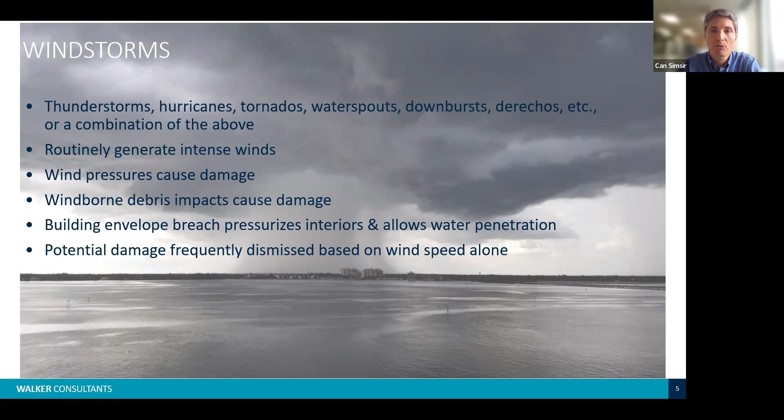So potential damage from these events is sometimes dismissed based on wind speed alone. But there are other factors besides wind speed to take into account that affect buildings and potentially damage them. We'll be looking into those factors as well during this presentation.

Damage caused by windstorms - there are several types of damage listed here, but I think there's more that can be added onto this list. For the roofs, definitely we see blown off, uplifted, and impacted roofs. We see collapsed brick facades, localized structural failures in buildings and other structures. As I mentioned, windborne debris impact is a big concern.

When debris breach glazing and other components in the cladding, they'll damage not just the interiors, but also cause damage to the framing components of these window and door systems. And as the interiors are breached, you'll get pressurization of the interiors, which will cause damage to the interior partitions in the buildings.

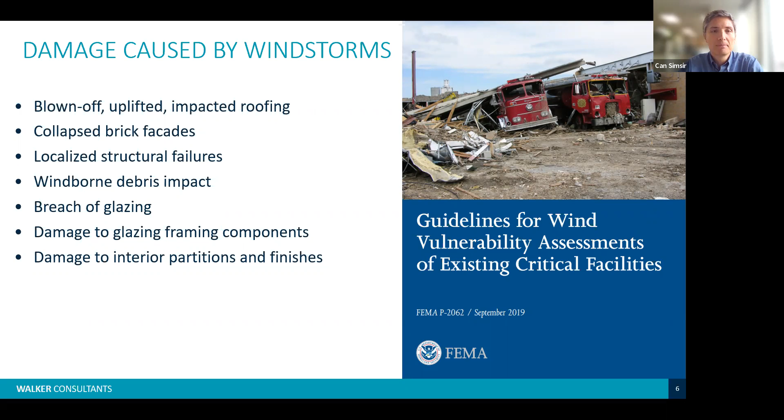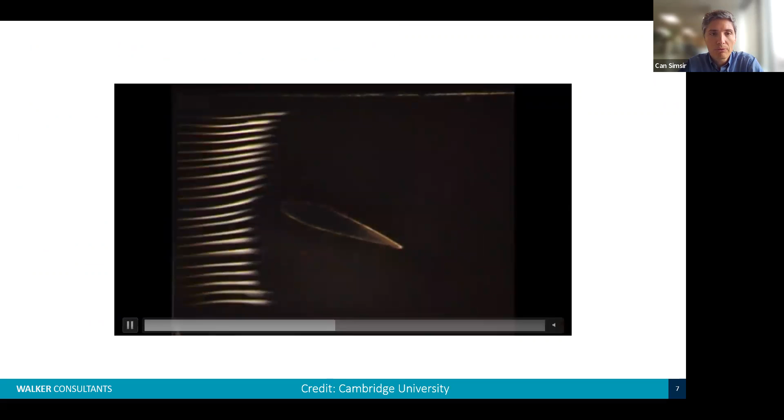This is an illustration of an airplane wing. You see the cross section of the wing in the middle, and this is a video that shows the wind flow around the wing. As you can see, the flow is smooth and streamlined - what we call laminar flow. The wind flow around wings is one thing, but the wind flow around obstacles like buildings is an altogether different environment. So in the next slide...

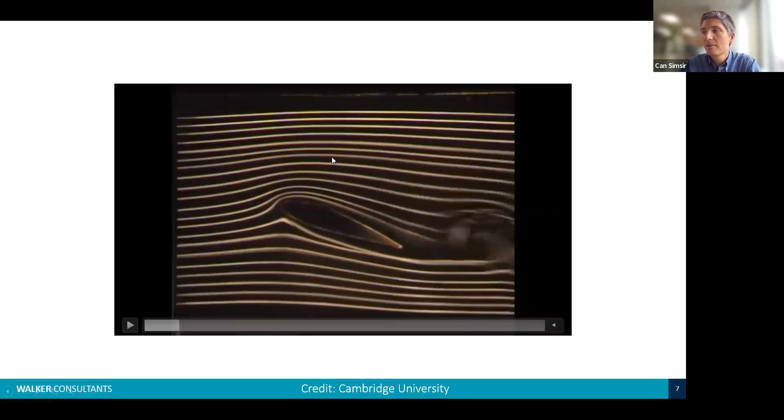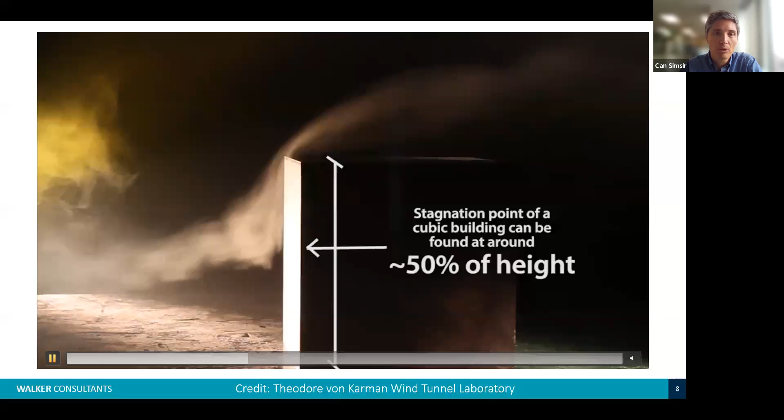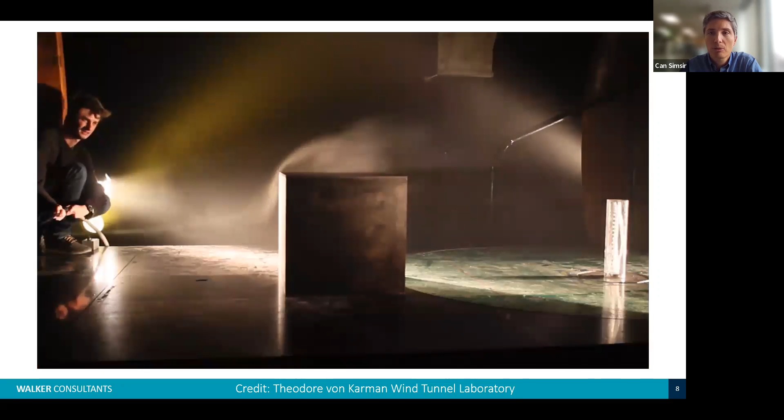What you're seeing is a block in the laboratory that simulates a building and the wind flow coming at the building. Buildings are essentially obstacles in the wind. When the wind impacts the building, it creates a turbulent flow that goes around the building, creating vortices, such as this horseshoe vortex that you see in the middle here.

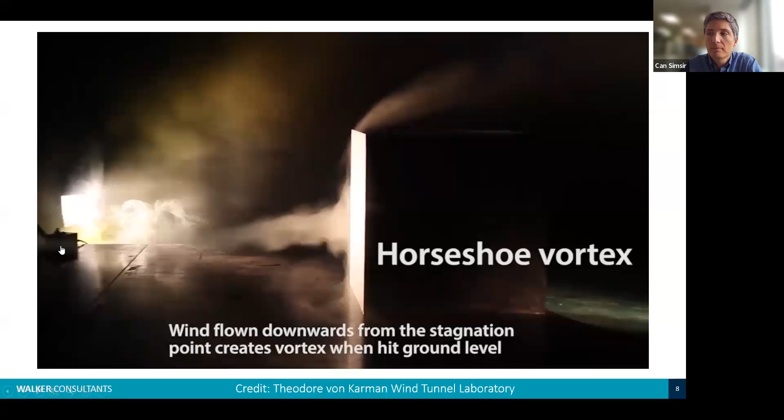Dr. Simsir, let me jump in and ask one question.

I think there is a misconception in the industry that the leeward side of the building is not impacted to the extent as the windward side that receives the brunt of the impact of the wind. Can the leeward side of the building sustain damage given enough wind speed to the windward side?

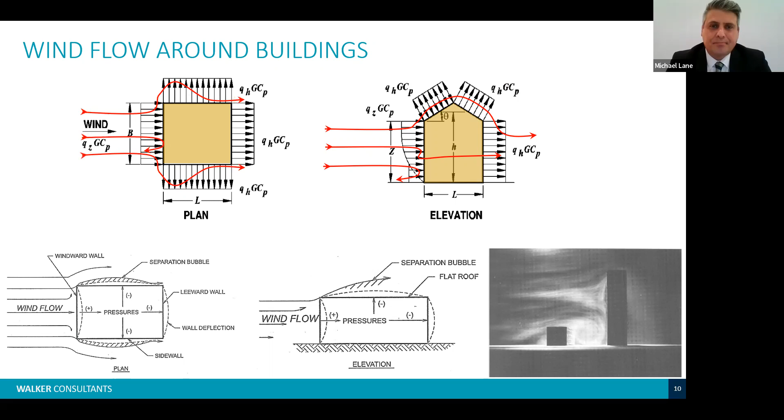Correct. As you can see in these images, the leeward side is subjected to intense suction pressures in addition to the positive pressures on the windward side. So you will see depressurization of the exterior facade on the leeward side of the building.

Now, in some storms, such as a hurricane that affects a property, as this hurricane passes over the property, you will see a complete reversal of wind direction. That means the building elevations that were subjected to positive pressures before will now be subjected to negative pressures once the storm passes over the property.

So your windward might become leeward, and your leeward might become windward during the course of a hurricane going over the property. That's another reason the leeward side may also see wind pressures, because that becomes a positive side of the building, or windward side.

As I mentioned earlier, another phenomenon that occurs is the internal pressurization of the building, shown in these two bottom images. If there is a breach in the building envelope, that interior pressurization will be even more, adding on to the exterior pressures outside the building. So the building will be subjected to even larger pressures.

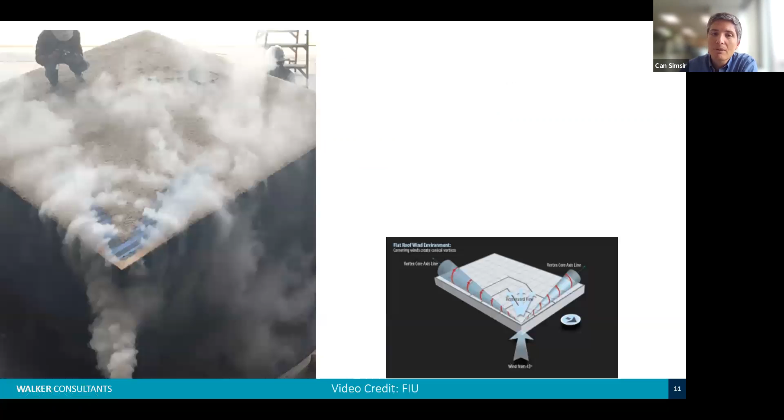This is a laboratory simulation of winds coming at a roof. That wind flow over the roof creates conical vortices, shown in this illustration at the bottom right. You'll see this horseshoe pattern forming in the roofing gravel.

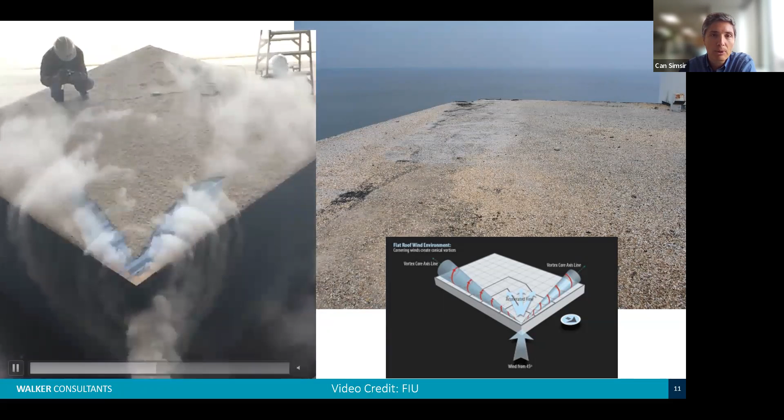And it's not just in the laboratory, but we see this in the field on building tops where roofing gravel has been scoured in a horseshoe pattern due to those vortices generated on the rooftops during a hurricane or other intense storms.

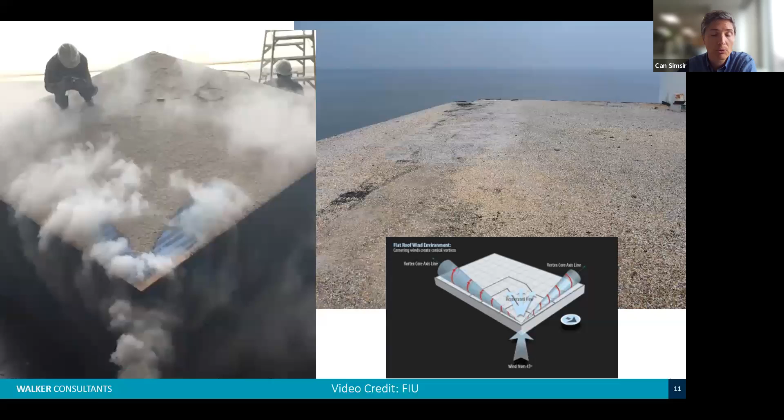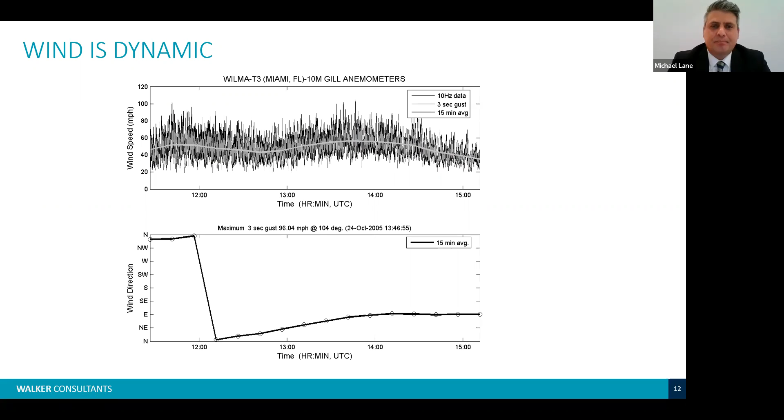Now, Dr. Simsir, is that typical, that you see this in many extreme wind events: category 3 and 4 hurricanes, tornadoes, derechos, and others? Yes, especially in hurricanes, regardless of intensity, if the eye of the storm passes over a property, or the property is close to the eye, you'll see this intense change in direction of the wind. For other storms like tornadoes, you might see that as well if the tornado is very close to the property.

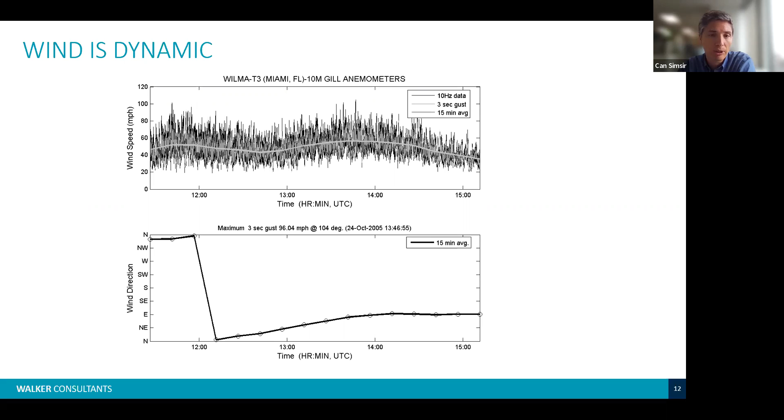When you consider that you might see several fluctuating cycles a second, then in a long duration storm such as a hurricane, these components and their connections may buffet repeatedly for thousands of cycles over many hours during the storm.

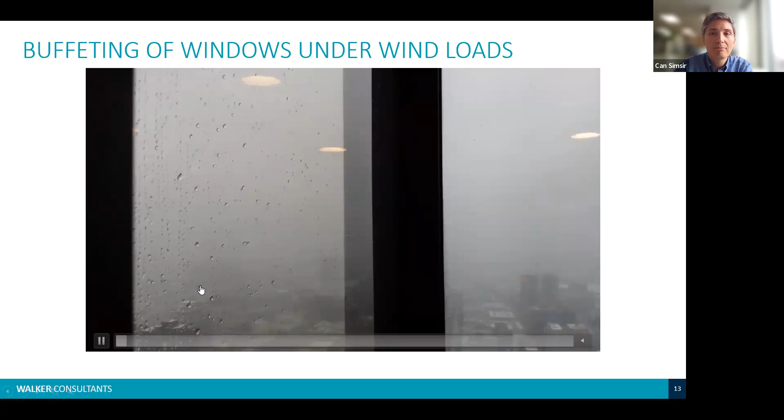One thing that we see commonly with hurricane property insurance claims is if the window is not cracked or displaced, no damage has occurred, according to the insurance company adjuster. Is it possible that the building envelope could be compromised by this buffeting action, or the movement or vibration of the windows in an extreme wind scenario?

Yes, so it is potentially possible. For instance, these windows will bend and deform under pressure during the storm, even if they don't break. The framing joints of the windows will get exercised with buffeting. I have an animation later on that will illustrate this phenomenon of a door.

In addition, the window gaskets and glazing stops will displace and loosen as well. So all of this will create avenues for water to infiltrate through the window and into the building, even though the window may appear intact and undeformed after a storm. It's best to inspect those windows after a storm.

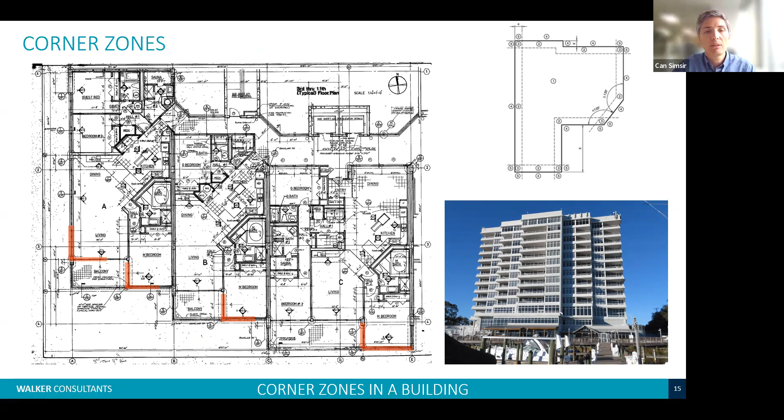We often hear about the 74-mile-per-hour wind that starts a hurricane, when a windstorm becomes a hurricane. But we note that that's the sustained wind speed over water. As that hurricane moves over land, the wind speed that's defined as a hurricane will drop.

So a sustained wind is defined as a 1-minute wind in the building codes, the wind that's averaged over a 1-minute period. If you look at the gust, it's defined as a 3-second average wind.

And so wind speeds can be measured for different averaging times, whether it's 3 second, 5 second, 1 minute, or 2 minute. But it's important to be mindful of these averaging periods, because you might end up seeing different wind speeds for the same windstorm event. The height at which the wind speed is reported is also important. But the building code provides tools for us to convert these numbers between each other.

Another important factor is the looseness of the building. That's not a technical term, but it's the term engineers will use to address permeation of the barrier, of the envelope. If the building is loose, not tight, air and moisture can get into the building, and obviously during an extreme wind event that can cause additional damage.

And finally, one additional factor that has to be considered is the height of the building. Dr. Simsir is going to discuss how the height of the building may play an important role as well. Yeah, thank you, Mike.

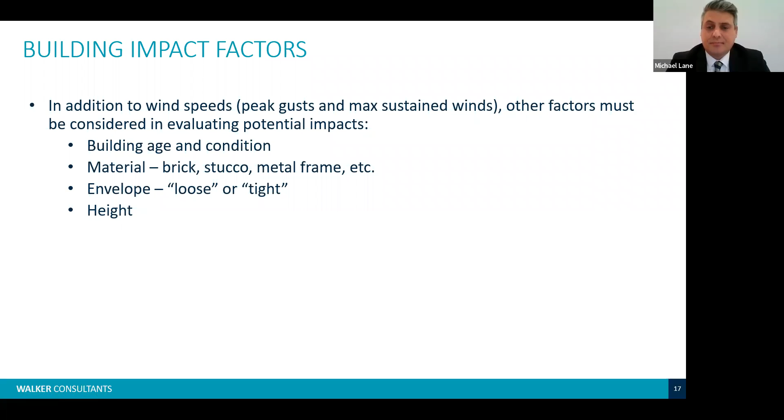So the next question is, does wind speed always increase with height? The short answer to that is no. We have some windstorms, such as tornadoes and downbursts, that will have a variation of wind speed over the height or the altitude.

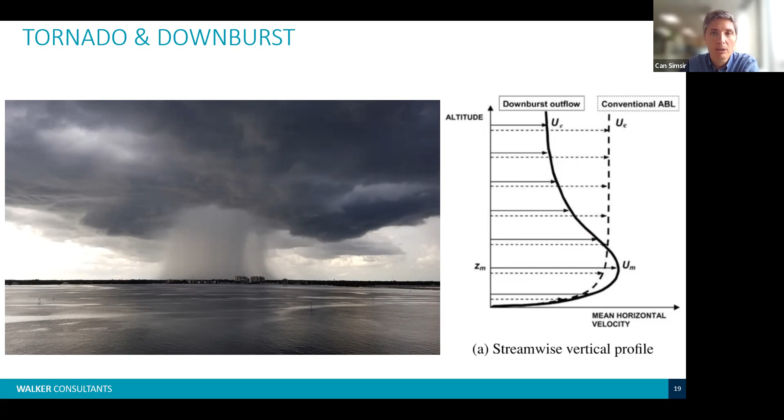This is a cool video of a downburst from Austria. As you can see, there's a storm approaching and going over the lake, and it dumps a whole lot of water. But you can see how the winds are in that downburst—they go vertical downward, and then from there they spread out. So the wind has a downward and outward flow in a downburst.

In a tornado, it's the opposite. The tornado will suck the winds from its surroundings, so you see an inward flow towards the vortex of the tornado, and then upward flow after that. But here in a downburst, it's the opposite.

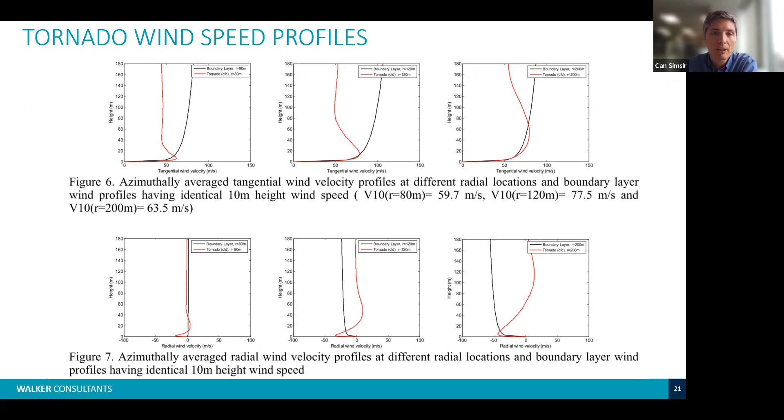Again, here I'm comparing the various wind speed profiles for tornadoes of varying radiuses, or radii. And these are very different from a straight line wind that you see in black in these figures. So the size and the radius of the vortex of the tornado is another factor in these windstorms.

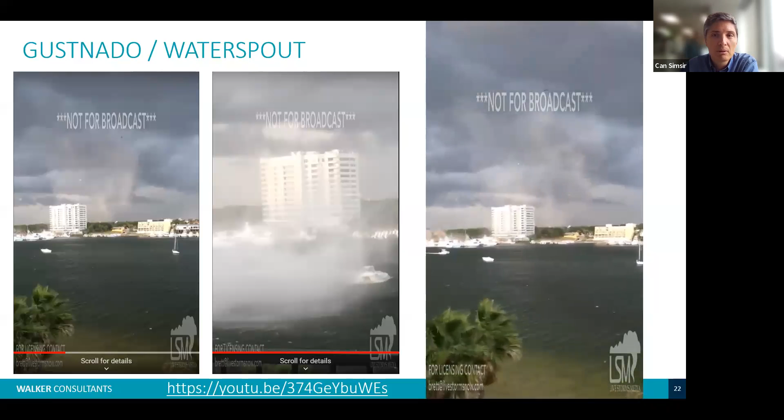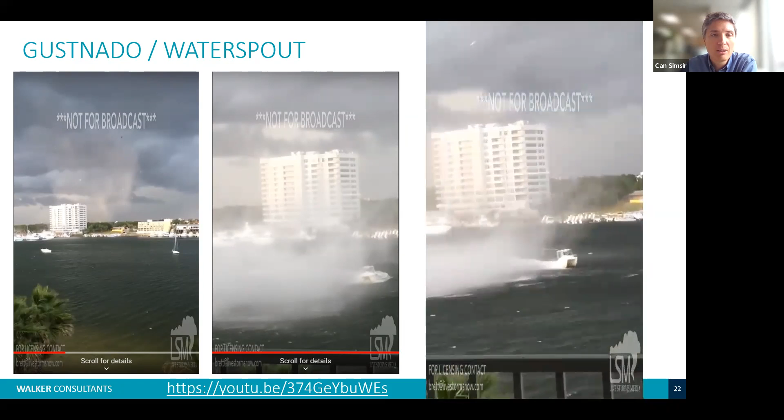This is the video of a gustnado, as it's called, which is a small tornado that comes over land, but then goes over water and turns into a water spout. As it moved over the white building at the back, it created significant damage to the roof and windows of that building. The wind pressures on that building were amplified due to the nature of the wind flow of this water spout, so you would end up with wind pressures that are more for the same wind speed that you would see from a straight line wind.

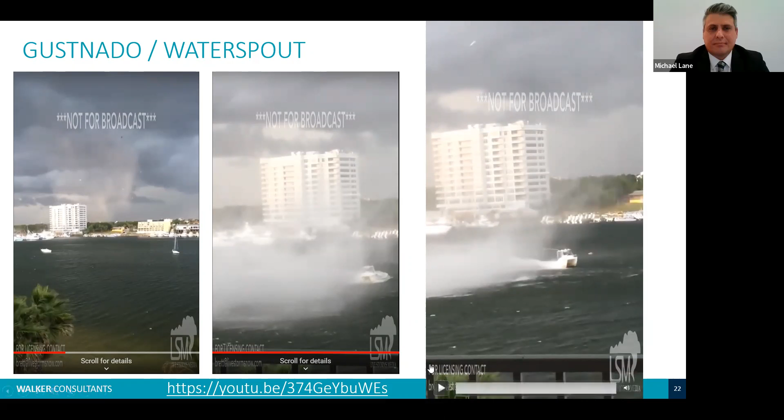Non-synoptic winds—these are what we would call winds for tornadoes, water spouts, or other windstorms where you have vertical and rotational wind profiles in addition to horizontal winds that you would typically see in straight line winds. So by non-synoptic, I'm referring to these winds that include vertical and rotational components in addition to the horizontal component. And they regularly damage structures.

These additional components contribute to the wind profile. And if the wind speeds are even lower than design speed, it doesn't mean that the building will not get damaged. So that criteria should not be the sole basis for evaluation of these buildings for damage. Understanding the wind and its interaction with the structure is critical to our understanding of design and investigation issues, and of course the wind load path is critical to design and investigation as well.

Now, let me ask one question for the lay people attending this presentation, many of whom are lawyers and don't know what words like synoptic mean. Could you just, as best as you can, explain the difference between synoptic winds versus non-synoptic winds?

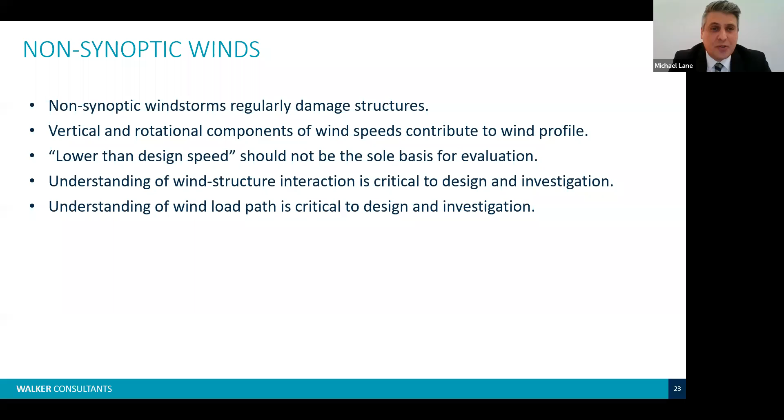Fair enough, I think I got it. Okay, so now we're going to talk about whether shutters across windows can prevent wind damage to the structure.

We have a colleague in our office who has actually contributed to a paper on this topic. We sometimes see presence of shutters on windows and balconies of buildings. These definitely provide reduction in the impact of windborne debris and wind-driven rain on these systems, but they do not provide protection of the doors and windows from wind-induced pressures, because the wind pressure equalizes between the front and back of the shutters, which again exposes the doors and windows to similar wind pressure differentials that you would see in the absence of shutters.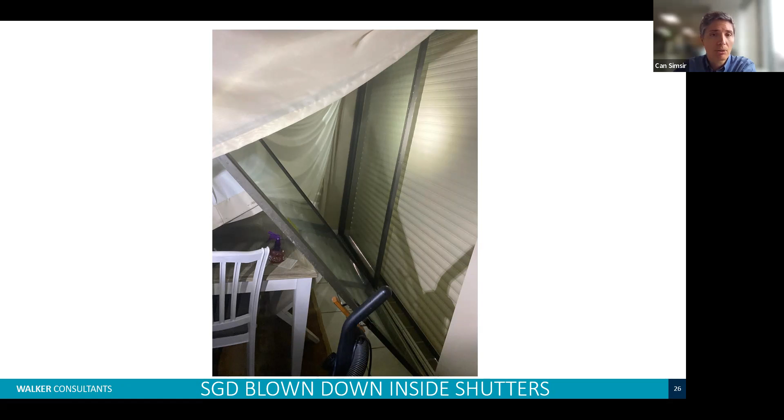The building codes state that you need to provide either impact rated glazing for these windows and doors, or if you have a regular door, you can provide shutters. But note that there's no reduction in the design pressures for these windows when they have shutters on them.

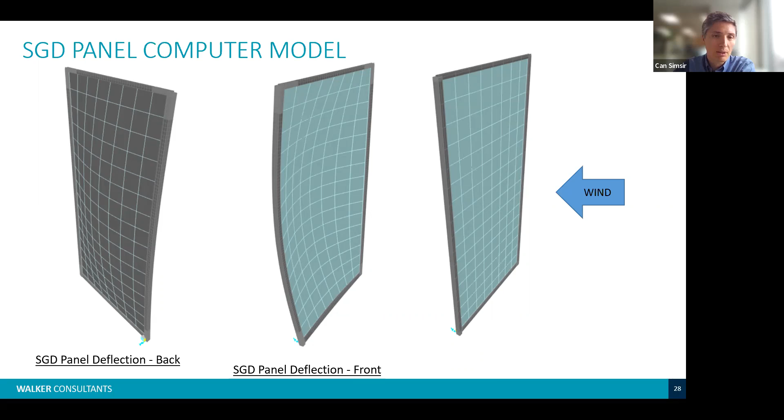So it becomes important to understand the performance of these components. This is the animation I mentioned earlier, where we put a sliding glass door panel in a computer model and put wind loads acting on it, which pressurizes and bends, deforms the sliding glass door, which then...

causes the framing joints to open up and rotate, which allows water to intrude. This is a video of that animation showing the sliding glass door deforming under wind loads, and this framing joint opens up and closes during the storm. Here's a view from the back side of that same joint.

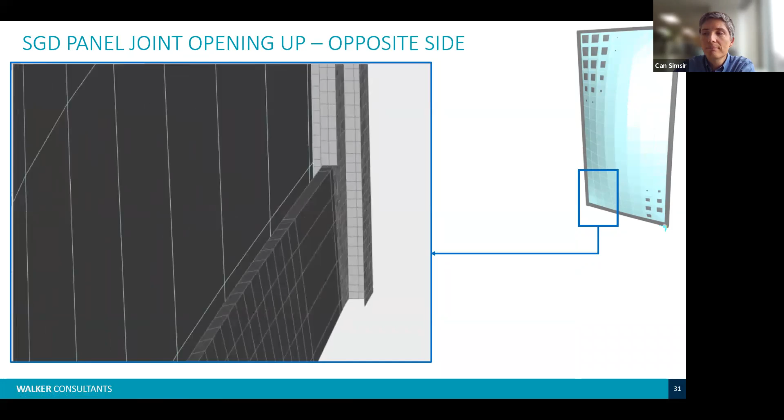Another issue we always see is roof tiles on buildings. The wind pressures will cause them to flutter. This is a laboratory experiment of a small tiled house, and you'll notice in this video that the tiles, even though they're not blown off, keep fluttering. At some point, as the wind speed gets higher, they might blow off or blow away from the building.

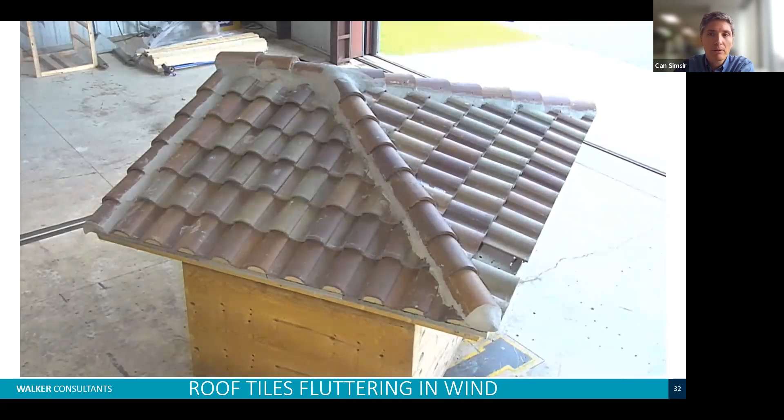Blown away tiles will cause further damage to other tiles in the roof. This fluttering is important because it causes tiles to uplift and shift around and impact other tiles, which might cause them to crack and break, even though they may not be blown off.

One last slide from me is this. As the technology gets better, we start doing inspections by drones. However, we should be mindful of the capacity or the limits of drone inspections.

In this slide, you see the picture on the top right corner where we're looking at the roof of a building, and the rectangles in blue are the areas where the drone located damage to the roof tiles, where tiles were either blown off or broken. But when we walk the roofs ourselves and do a hands-on inspection, we saw a lot more damage. So we added the areas of damage we saw with additional breakage of tiles, marked with red rectangles. When you combine the two, you see there's a lot more damage to the roof than what the drone can see.

Dr. Simsir, these are the type of roof tiles we see more commonly along the Gulf Coast, more so in Florida and Alabama, than here in Louisiana or Texas, where we typically have asphalt shingle or mod bit roofing. Would you expect similar impacts on that type of roofing material, with displacement that may lead to damage to the underlayment or surrounding shingles under extreme wind stresses? Yes, you can expect displacements to occur during the storm.

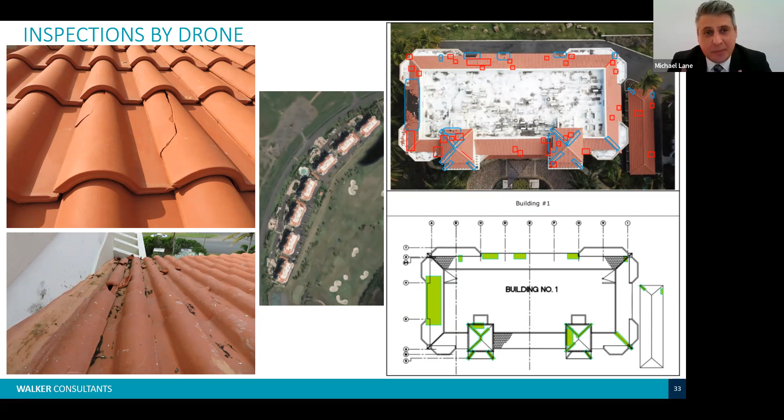And I think the other moral of the story here is you can't just evaluate roof damage with a drone. You've got to get up there physically and observe, lift up tiles and shingles, and see what's been damaged. Correct. The drones will provide an initial sense of the extent of damage, but it will not be as accurate as going over the roof and seeing it for yourself.

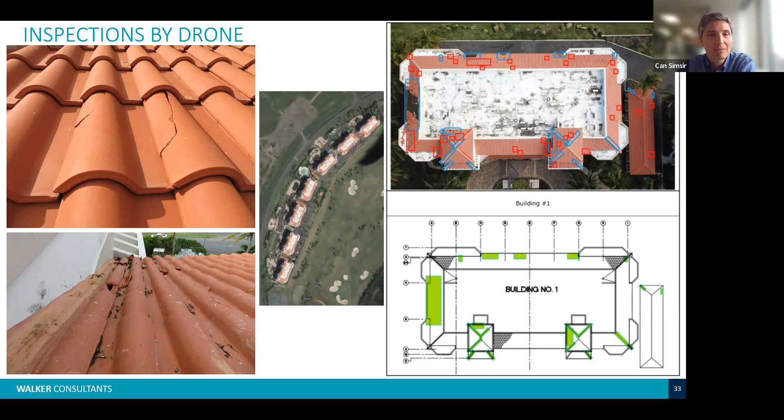Good afternoon, everyone. So now with that great introduction on winds and the different types of winds and what winds can do, it's a good time to talk about building codes. Our building codes are updated on a regular cycle, and they take advantage of lessons learned both in the field from damage investigations, such as the type that Can was describing, along with incorporating additional research that has become available.

As part of that process, we have a document called the American Society of Civil Engineers Standard 7, and the latest iteration corresponding with this year, 2022, came out earlier this year. The title of the standard is Minimum Design Loads and Associated Criteria for Buildings and Other Structures. It will be adopted in the next version of the International Building Code, which will be in 2024.

Now, I'm going to be talking about just the wind load provisions in the standard, and those cover 7 chapters, which have 135 pages, with an associated commentary of 85 pages. So I'm going to go through all 220 pages of that right now. Sorry, just kidding. And we'll extend the program 24 hours for everybody's benefit. I'll also go a step further - I will show no equations in this presentation so that you all can breathe easy.

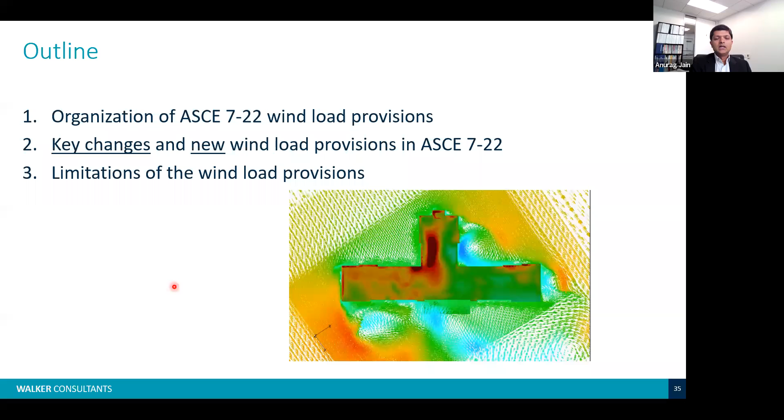So I'm going to quickly go over the organization of the wind load provisions of this standard. I was fortunate to participate in the development and update of this standard. I'll highlight the key changes and new provisions. Going over all of it would be time intensive, and we don't have the time to do that right now. But one key thing I want to highlight is what are the limitations of the wind load provisions in the building code. Many of you that are attorneys on this presentation would appreciate that, in the sense of what are the boundaries of the building code, what does it not permit. So I think that will be informative.

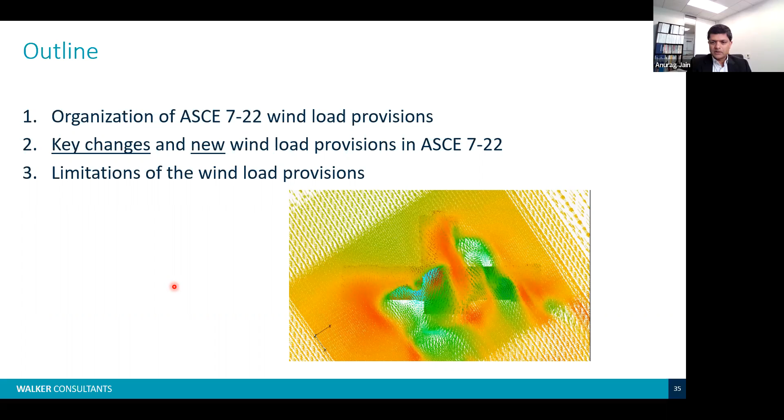As I mentioned, the ASCE 7-22 wind load provisions are organized in 7 chapters. There is chapter 26, which covers the general requirements of the wind load provisions. That lays out various definitions and describes what you need to do for coming up with the design wind forces.

Now, there are 2 parts of it. One, what we call the main wind force resisting system, and the other part we call the components and cladding. If you draw a parallel to a human being, the skeleton and muscles would be akin to your main wind force resisting system, and the components and cladding will be like your skin. The skin resists the elements, and then the main wind force resisting system, or the skeleton and muscles, resist the forces and keep the structure standing up.

There are several chapters, 4 chapters dedicated to the main wind force resisting system. It's a function of building height, and also a function of maybe appurtenances to a building like rooftop equipment. For components and cladding, there is a single chapter, chapter 30. Then there is chapter 31, which deals with wind tunnel procedures, and it just alludes to those procedures - there is a separate standard for wind tunnel testing.

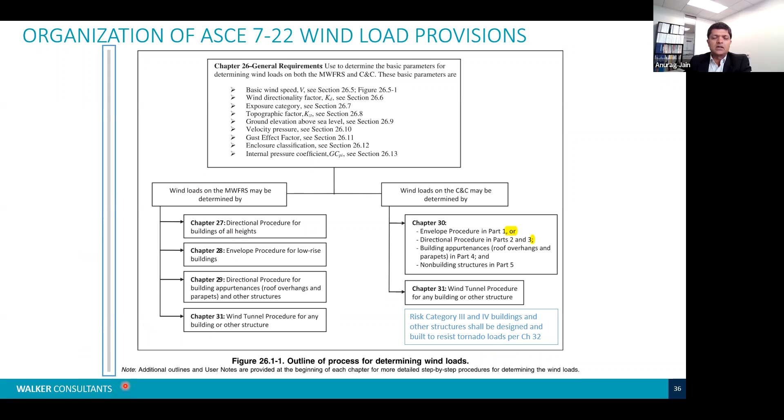Now, in going through the wind load provisions, the code organizers and authors have developed a way for the reader to identify what changes have been made, by putting a light gray colored line in the margins that highlights what the changes are, so the reader can be aware of what changes have come about.

So in terms of key changes that have been made, there is simplification in the code language, but more description to make it better understandable and more user-friendly. The design wind speed maps have been updated, specifically for the hurricane coastline - the wind speeds have gone up slightly. And in the wind speed maps, we have what are called special wind regions, typically the presence of mountains or gorges or terrain features which might accelerate the flow of wind. Those have been added and updated.

Now, going forward, ASCE has made its hazard tool available to the public. So you can go to this website and take a look, and you can determine site-specific hazard, whether it's wind loads or earthquake loads or floods or tsunami loads. You can use this hazard tool to develop site-specific hazards.

Recently there is also a pre-standard that has been developed, called performance-based design for wind forces. That really alludes to the design for structures that don't conform to the confines of the building code. So if you want to design a high-rise building, the building code may not have all the provisions, or a high-rise building may not meet all the prescriptive requirements of the building code. Therefore, you need to have performance requirements, and this pre-standard alludes to that.

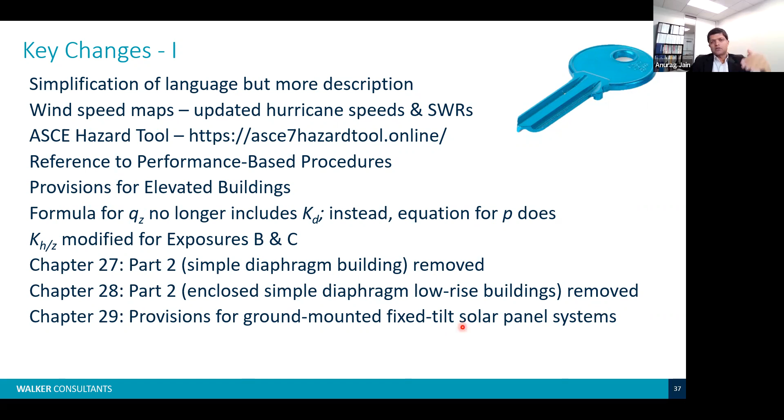There are new provisions that have been added for ground-mounted fixed tilt solar panel systems. Previously, there were provisions for rooftop mounted solar equipment, but now new provisions have been added for ground mounted as well.

Similar to chapters 27, 28, and 29, where the tabulated values have been removed, for components and cladding, the tabulated values of design pressures have been removed. The pressure diagrams for roofs have been simplified, so they are easier to use and they contain more detail. There have been new provisions introduced for canopies attached to buildings for buildings taller than 60 feet. And there are also new provisions for pavers on low slope roofs.

Those pavers can fly off if they are not properly designed. Most of the times these pavers are just loose laid on the rooftop. So there are provisions there now.

In the wind tunnel procedure chapter now, there are definitions for using wind tunnel results or reports for sites that are for specific sites or for multiple sites. For example, a solar farm - there could be a similar solar farm that will be installed at multiple locations. So there are provisions now for that.

And then provisions have also been added for performing a peer review on wind tunnel tests.

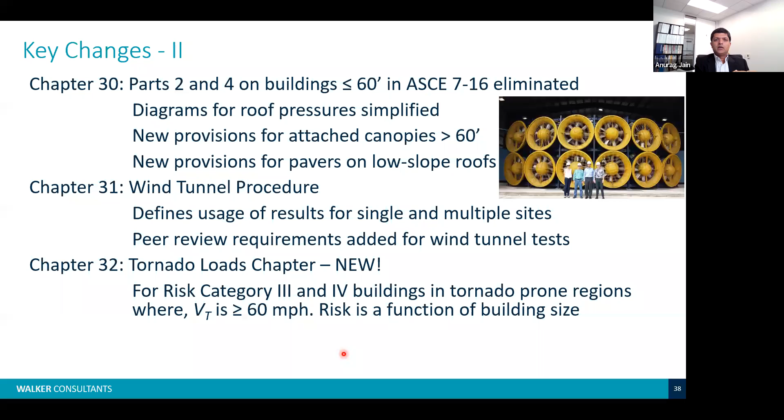And the tornado risk is a function of the building size. So let's say if you have a giant warehouse and a tornado is going by, you have a higher probability of getting struck by a tornado compared to a small building, like maybe a small building which houses a generator system.

John already went through this, but I wanted to take this opportunity to define something. We as engineers and students are frequently taught that wind speeds are static, and we consider those wind forces as static. But in reality, winds are dynamic, as you saw from those videos. They change speed and direction, and the loads they impose change with time as well.

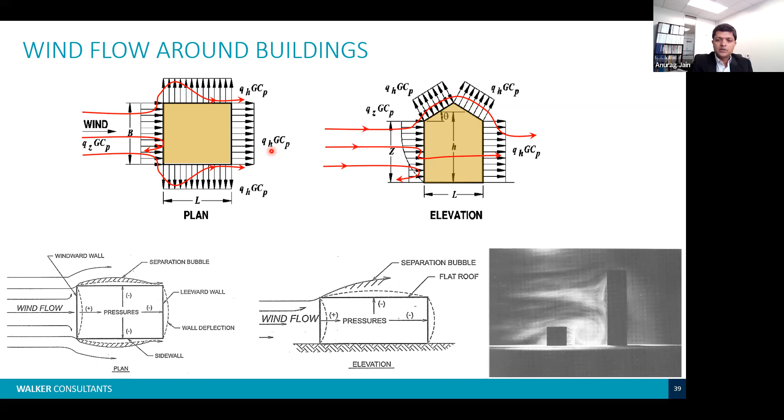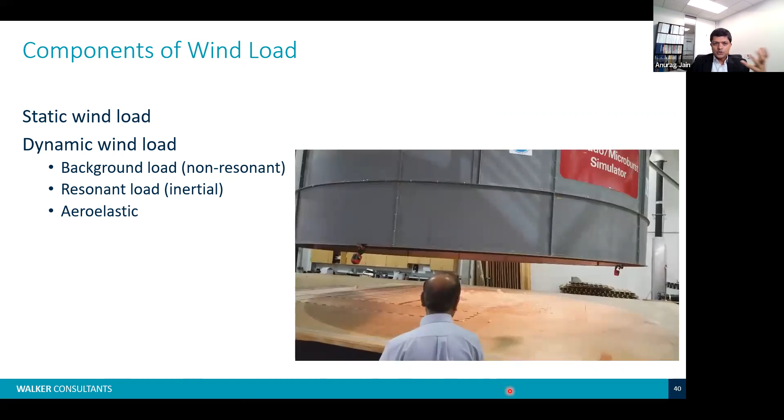Here, what we are seeing is a tornado simulator at Iowa State University, and the results from which were used for developing some of the tornado load provisions. I was fortunate to go and observe the testing, or a run of the tornado simulator. What I wanted to point out is that the wind load consists of several components.

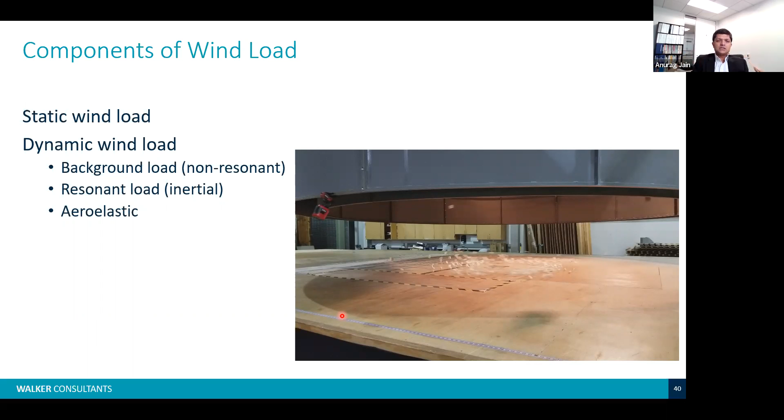One is based on the turbulence in the oncoming flow, and it's called the non-resonant component. The second part is due to the dynamic characteristic of the building itself. So if that matches with the characteristics of the oncoming flow, there might be resonance - those might coincide, and it may create a resonant or an inertial response.

And finally, the third component is aeroelastic. When the winds and the structure are such that the structure itself moves a significant amount, and that movement will create and generate loads. It can also reduce loads, but it has a component to it. For longer and more flexible structures like taller buildings or long span bridges, that aeroelastic component is important.

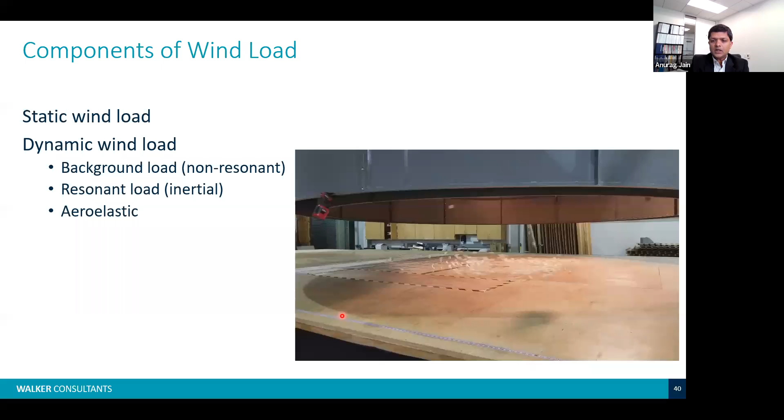Next, I'll spend a few minutes talking about limitations on the provisions of the wind loads in ASCE 7-22. The provisions will say that it's applicable to buildings that do not have response characteristics that make them subject to across-wind loading, vortex shedding, galloping or flutter, channeling effects, or buffeting in the wake of upwind obstructions. However, those are not defined in the wind load provisions.

And then it clearly says the limitation section is: if you have a building or structure that has unusual shape or response characteristics, then you cannot use the provisions of the standard. Instead, you need to rely on recognized literature or use a wind tunnel to identify what those design loads should be.

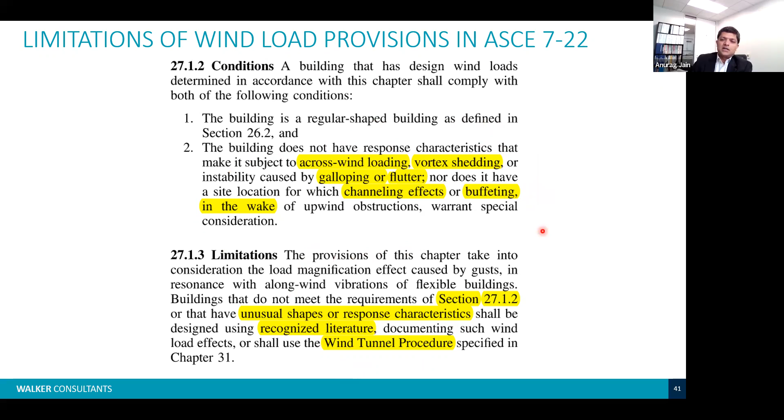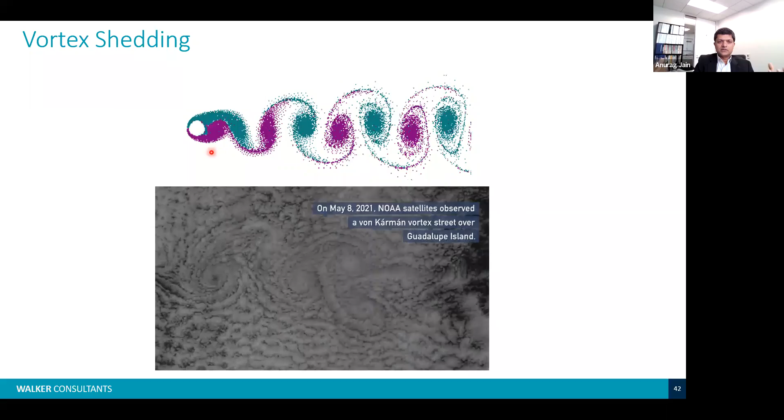So let me try and define for you what some of those limitations are and their impact on buildings. So vortex shedding - what happens is if a wind flow approaches a bluff body or a shape, like our civil structures, then there will be separation of the flow that happens, and the separation of the flow generates vortices, and vortices typically shed from one side and then the other.

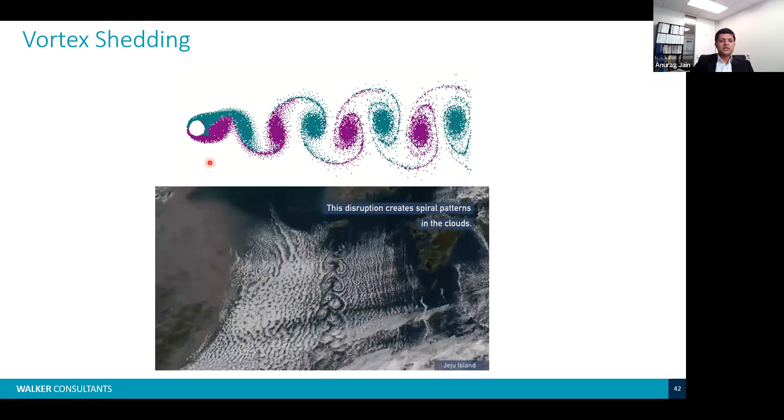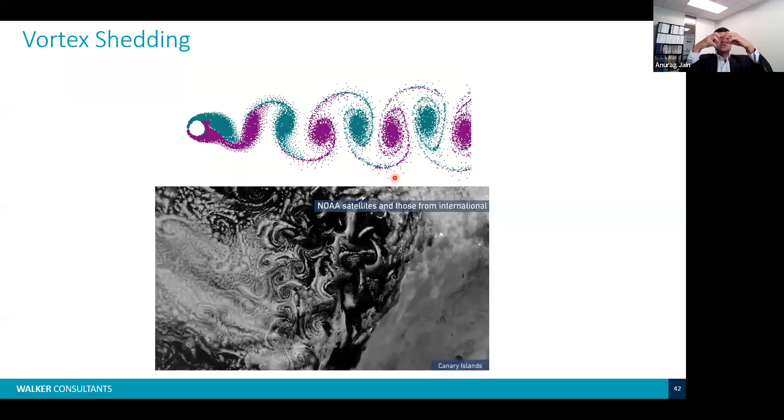You can see the green and magenta or purple vortices are getting shed alternately. Now that alternate shedding of vortices will create a suction pressure, which will pull the building to one side of the structure and then push it back to the other side. So that will create an oscillation, and it generates wind loads.

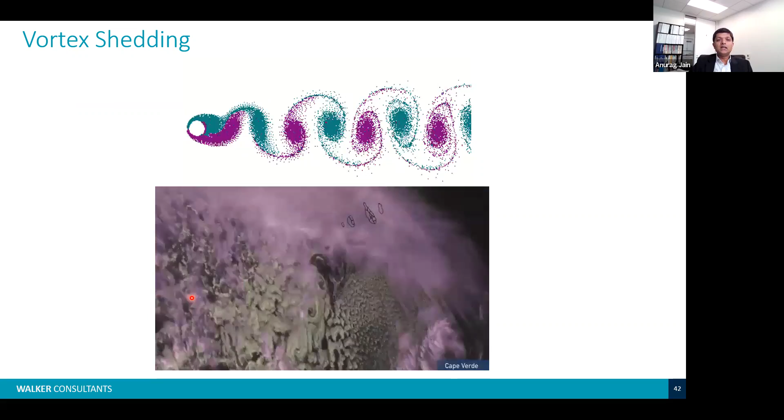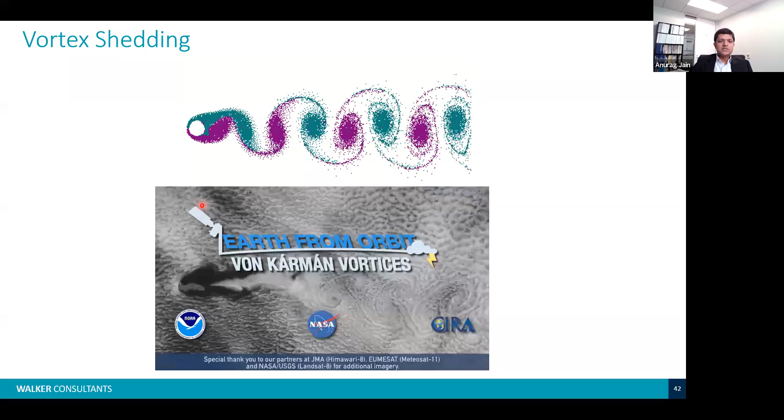Now, on the figure below, what is seen is just vortex shedding in nature. As winds and clouds go by islands or other formations, then even that will cause vortex shedding to happen. These images have been taken by NOAA satellites, and they show how vortices appear in nature. If you go to a stream for fishing or to the base of a bridge, you might see vortices being shed just by the flow of water.

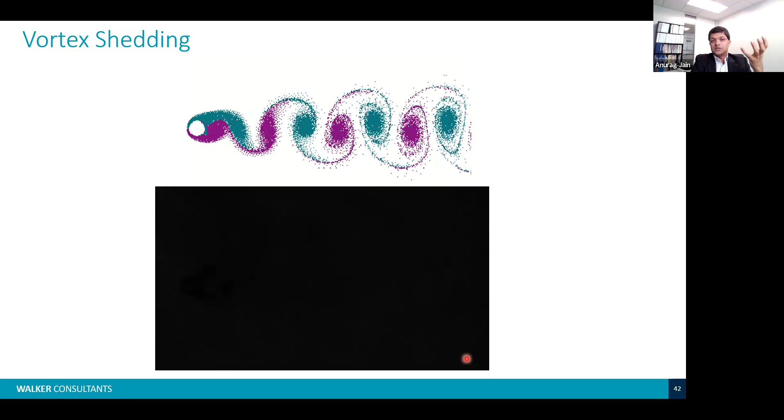One example that comes to mind is in a building, there were architectural columns installed, and these columns were slender, and their characteristics were such that they were prone to vortex-induced vibration, but they were not really considered during the design. When vortex shedding happens, the resonant frequency of the structure locks in with the frequency of the oncoming wind excitation, and that can cause high amplitude vibrations, and that can result in fatigue.

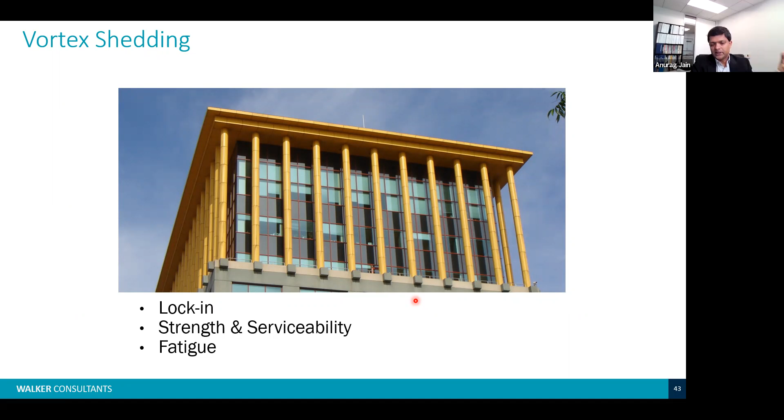And then it could be damaged. Across-wind loading - most of tall buildings are governed by across-wind loading, meaning like I was describing vortex shedding. So winds are coming in this direction, if you can see my hand, but vortex shedding will create movement in a direction perpendicular to the direction of wind flow, and that's also called across-wind loading.

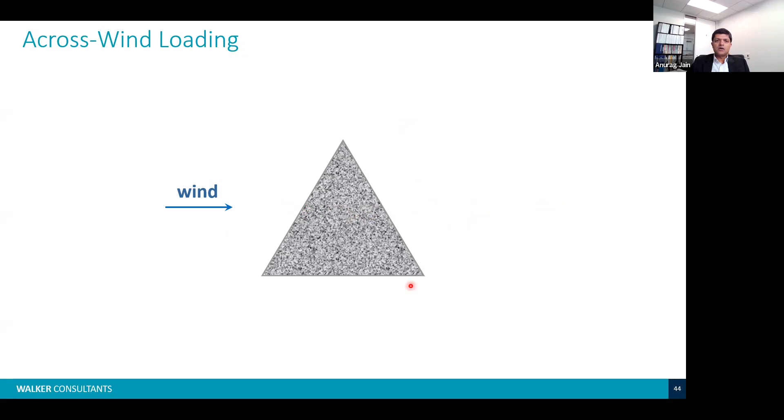And if you can imagine a structure whose plan shape is triangular, and if wind comes to it from the side, the wind forces will not just be in this direction, but they will cause it to move in the up and down direction as well.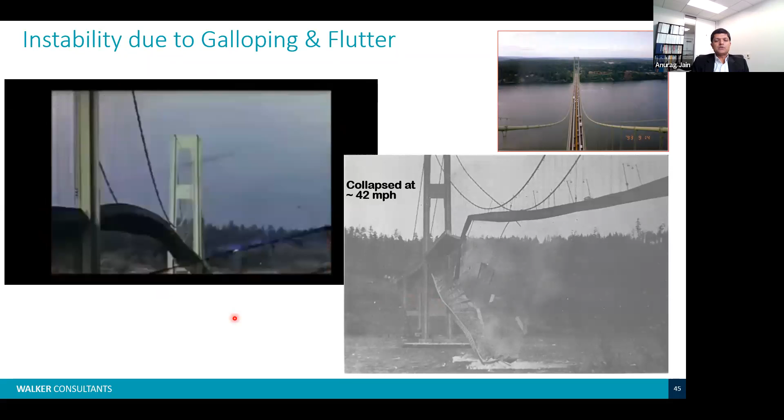I'm sure you've all seen videos of Galloping Gertie, the old Tacoma Narrows Bridge in Tacoma, Washington, that collapsed at a gentle wind speed of 42 miles per hour, four months after it was built. The reason for the collapse was flutter. It's frequently referred to as resonance, but it's not quite resonance—it's flutter. When flutter happens, that's an aeroelastic phenomenon.

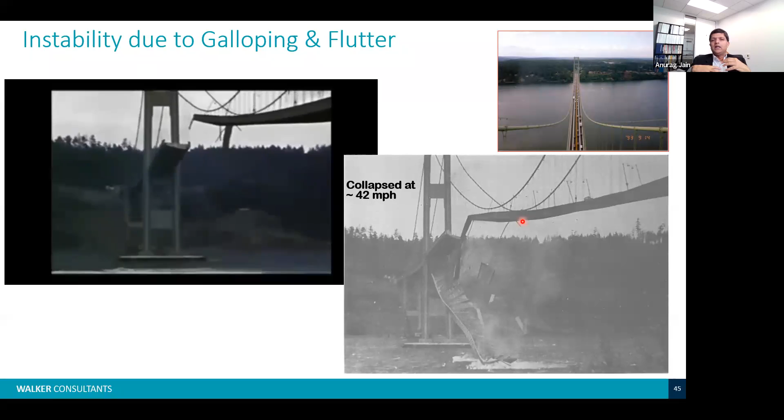We discussed that as the third component of dynamic wind loads. When that happens, negative aerodynamic damping is present in the system. Instead of damping the motion down, it actually amplifies it until it reaches an amplitude where catastrophic failure can happen.

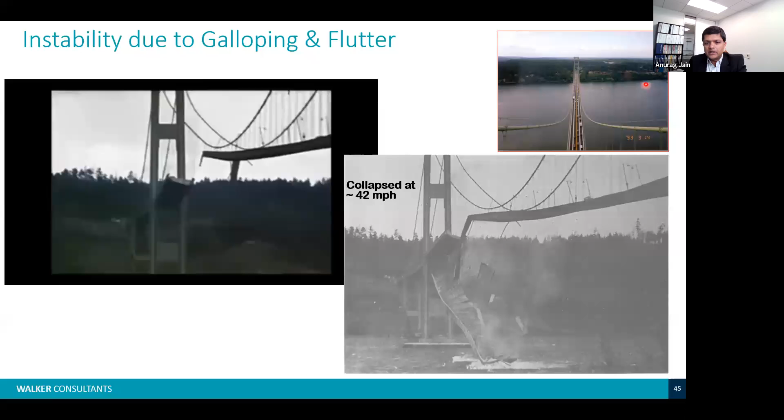I was fortunate to visit the old Tacoma Narrows Bridge as a graduate student and climb one of those towers, and that's a picture from there, from the top of the towers.

Channeling effects—where we are based in Southern California, you hear of wildfires, and wind-driven wildfires. That's because hot winds from the high deserts of Utah, Nevada, and Arizona come towards California and have to pass through mountains and canyons. When they get funneled through those narrow gaps in a Venturi effect, they amplify. Because of that amplification, the winds can be really strong and powerful, accelerating the wind flow and resulting in higher response or higher wind loads.

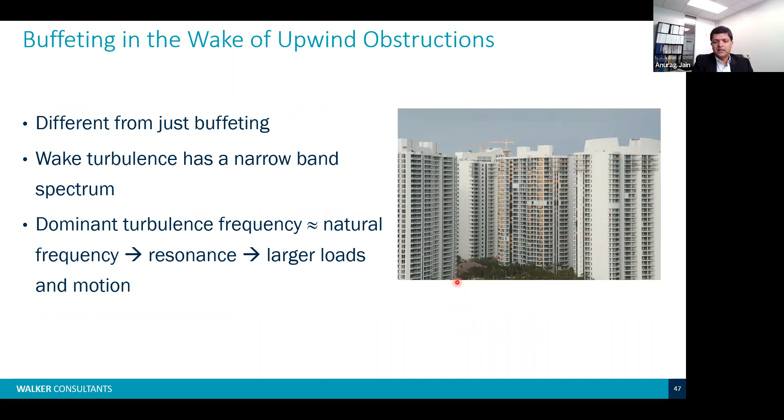Buffeting in the wake of upwind obstructions—in this image you see several high-rise buildings in close proximity to each other, but the building in the middle is boarded up heavily with plywood. That's because of buffeting due to upwind obstructions, and also funneling and possible generation of windborne debris that impacted this particular structure, which can also result in higher wind loads.

So for the last couple of slides, keeping in mind the time we have left, here are the key takeaways and key issues to consider as you're thinking about winds, wind forces, and wind storms: in the evaluation, has the windstorm speed been properly estimated?

Are there localized phenomena that might have affected the subject location or property? The proper interaction of the storm's wind with the structure needs to be considered—for example, the few things I've described previously.

Then, is it adequate to compare the design wind speeds to the storm wind speeds? For example, Mike had referred to older buildings. Older buildings were designed to a certain level of winds, but also to different provisions in the wind load codes. Is it adequate to just compare the wind speeds, or do we have to look at what those wind speeds generate in terms of pressures?

So looking at pressures is more critical than looking at wind speeds. Obviously, you need the wind speed to compute the pressures, but without looking at pressures, the evaluation is incomplete. And have the pressure calculations been done in a manner which considers all the factors involved in those calculations?

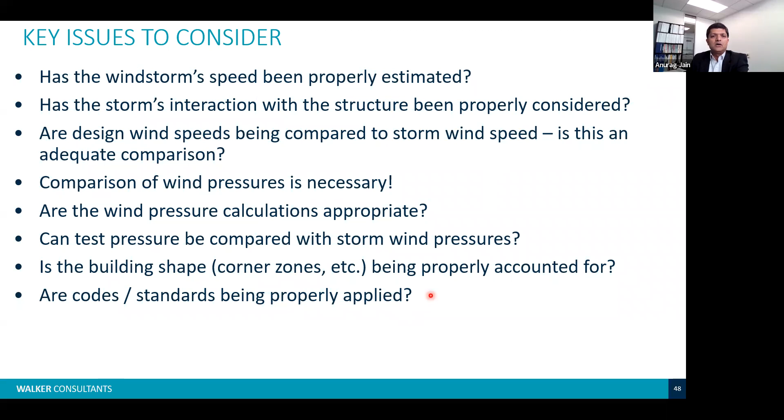In the past, in hurricanes and storms, there have been references to a pinpoint strike, especially when it came to wind versus water. Is that possible? It is—we saw that video where a tornado just went over a building. It is possible, but I think it has to be properly taken into consideration.

And then meteorologist reports have to be obtained. And then also, we shouldn't take those as gospel either, because many times meteorologists rely on radars, and those radars have their beams at several thousand feet above the property.

Now, if there is a localized phenomenon or non-synoptic type of winds, does the wind speed always reduce with height? We saw how those graphs look like, the nose-shaped profile, where winds could be higher closer to the ground and less so at elevation. So those have to be properly considered and kept in mind as the different components of the property are being evaluated, and whether they are damaged or not to be identified.

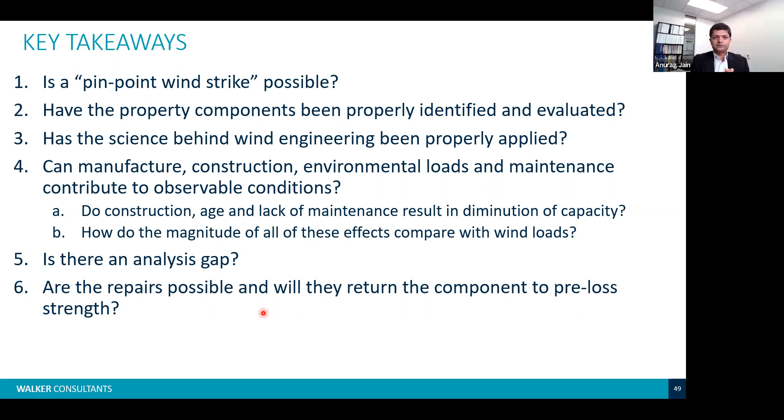And then when repairs are to be performed, whether the repairs will return that specific component to their pre-loss strength or pre-loss capacity to resist the wind loads they were designed to resist. So those are the key takeaways.

And then in terms of, if you are curious and want to look further, there are a number of resources available for you to consider. One particular one, geared for folks not very familiar with wind load, is an ASCE publication titled 'Wind Issues in the Design of Buildings.' It's a fairly straightforward document and easy to read. That'll give you a good place to start. There's also a number of other publications you could look at, several by ASCE focused on wind forces, to derive more information about wind and wind-structure interaction.

With that, I think we've used up the hour, so sorry we ran over a few minutes. I'm happy to answer any questions.

We do, in fact, have a few questions, although we are a little bit out of time. The first question we have is, someone has asked you to comment on the ASTM test for water penetration in installed windows and credentials for those performing the test.

I did not talk about those specific tests, but the standards are there, and the qualifications of people performing those tests. I don't believe those standards require specific qualifications, but obviously following the ASTM standard procedures and the experience of the testers should be considered.